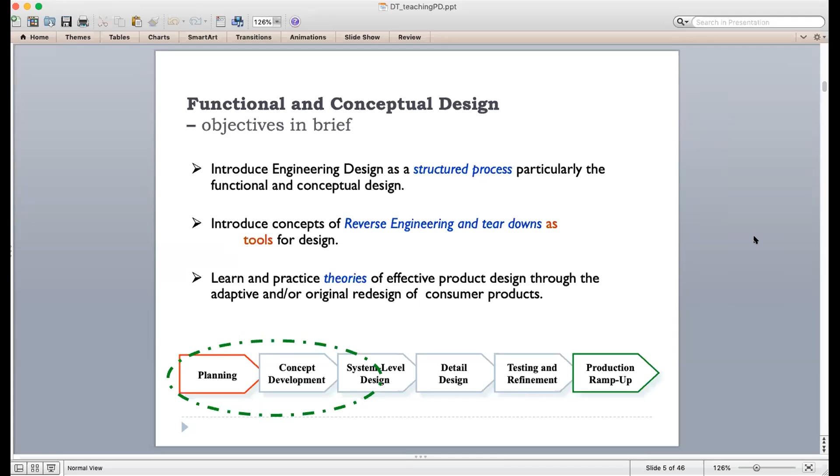As I had shown, from the entire product development cycle, we focus on the early stages of the design process, which is where we have a lot of synthesis. As you will see later, when we come to design details, testing, refinement and production, that is our conventional engineering. The scope lies there, in conventional engineering analysis. But these early stages of development is where the idea of innovation, the emphasis of developing these concepts, is placed. And the students are made to understand the significance of the need for a very detailed and thorough system level design and thinking about this form and function, and how we can develop the concepts.

As part of the lab, we have several activities to place emphasis on the different design processes. So we start right from building the teams. Even team building exercises are given to them so that as a team, they know how to work and what to expect, how they can assign tasks to different members, whether it be the leadership role or more of communication within the group. So they know how to gel together and work as a team. This extends to doing a lot of product tear down exercises, right from consumer products to engineering components like engines or drive shafts, to consumer products like electronic or mechatronic components used in home or office. So they do this product dissection and try to understand the form and function.

They also do a course project wherein they can exercise whatever they learn in terms of designing new products or trying to find a variant to the existing product. We try to also bring in industry wherever possible, because a lot of design problems are there in the industry, and sometimes these young minds, the students, just after their schooling, in their first year, are quite dynamic, very energetic, and they can also think very wildly. So thinking about concept development, when we as engineers know about the practical constraints and considerations of the design, our ability to think about the various ways of achieving a function is diminished.

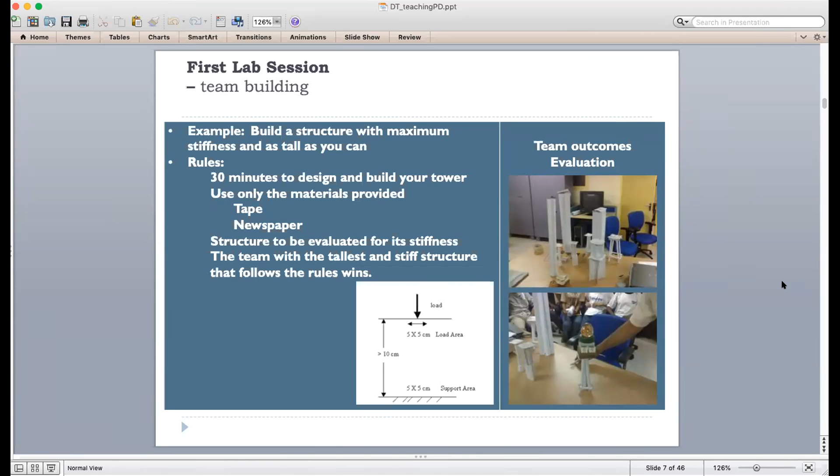What we do is we have a series of product dissection or product teardown labs, as I mentioned, where they try to understand what the product is and what the customer sees. So they use the product. Let's say if I have a mixer, they try to use it to see what are the functions of this. Or if there is a water cooler, they try to use that system and understand what this product is doing. And then we pose them questions like, how is it doing this? Or whatever function this product is performing, how is it doing it? So they try to understand product dissection.

Hello? So sorry, there is some disturbance, or I thought there was some question.

Yes, I am having practical examples. I have taken some 4 or 5 practical examples. I would be discussing that. Okay, yeah.

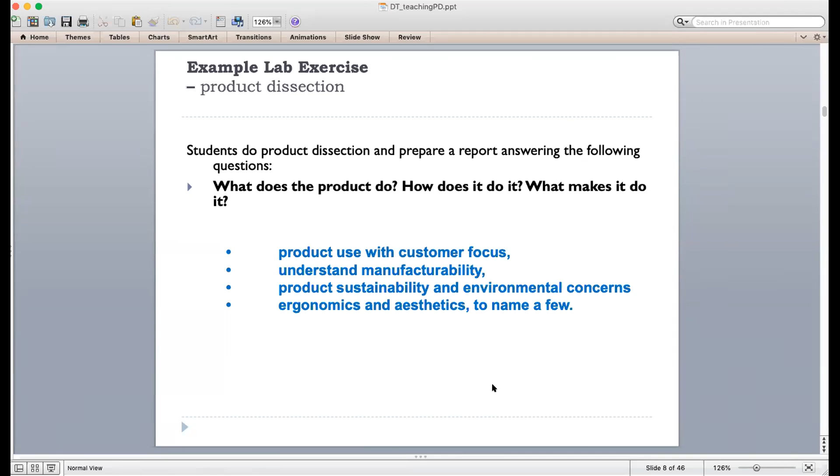So these are some things that we do for each product dissection exercise that we give. I just thought I will take one example. So here you see that there is a blender. Typically we have about 60 students. So what we do is we have about 10 to 12 products and a team of some 4 or 5 students. They cycle through this for the whole semester, wherein for each product, one group would have taken this blender and would have understood the design for manufacturing aspect.

But the next week, another group will take the same product and probably discuss design for assembly. This way, we ensure that the scope for each team with respect to each product is different, and there is no repetition or monotonicity that they can try to understand from another team. This also places an emphasis that between teams they can discuss later what they did and what they tried to understand. So we try to do this mix and match of different activities with different groups, ensuring there is no monotonicity in the whole exercise for the entire semester.

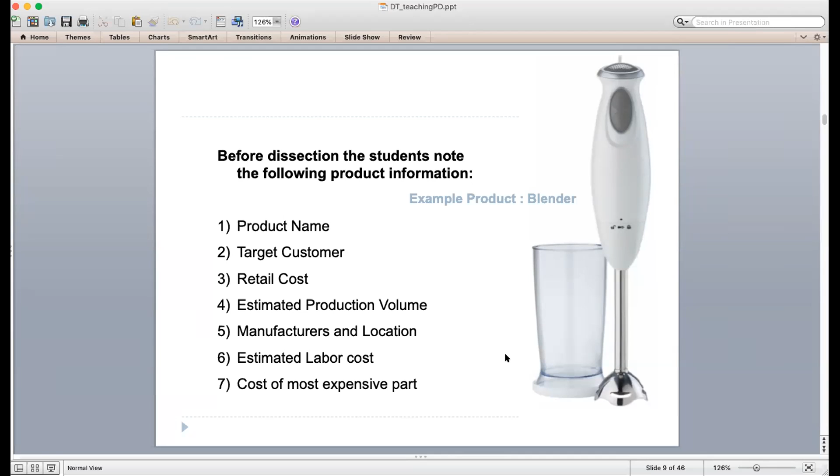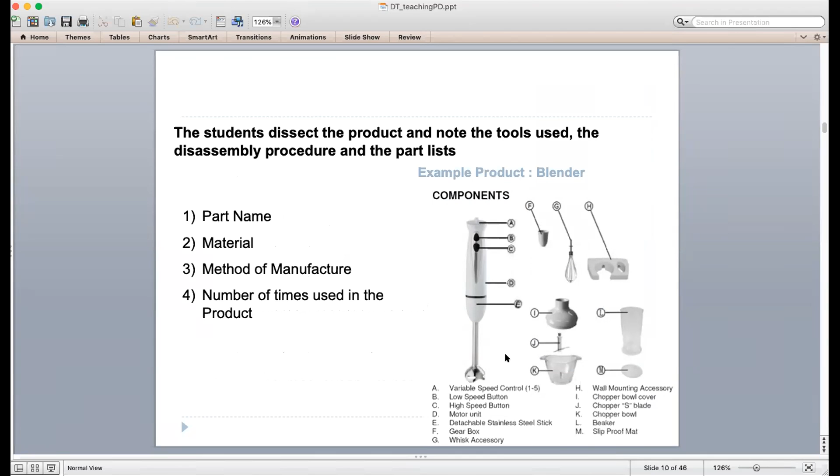So they understand the product dissection, the components, the method of manufacture, the assembly, as I said, and the cost perspective - can some components be replaced, or can some components be combined? Some design for assembly concepts can be used, design for cost concepts can be used. So these are some things that they learn.

And one other important activity that they do as part of each product is connecting this function and form. So we ask them to build what is called a function structure. If some of you have been doing this design course teaching, there are these concepts of function structure.

One of the earliest thinking in terms of this, and in terms of the presentation of this way of thinking, was done by the German design pedagogy people like Pahl and Beitz. Their book is very famous - the engineering design process book by Pahl and Beitz. So that introduces these concepts of creating function structure.

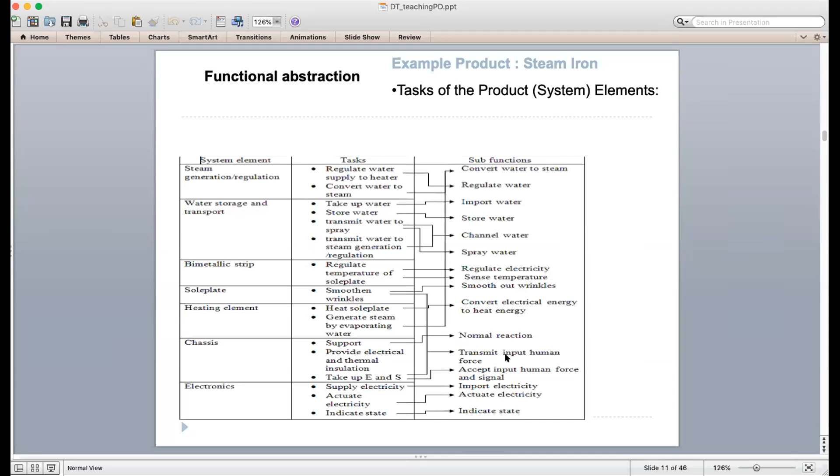So every product is seen as a flow of material, a flow of energy, and a flow of signal. So an abstraction of each product is made in terms of what is the material, what is the energy, and what is the signal. Every product is thought of as an embodiment of these three, and a flow structure is created. This creates an abstraction of the product in terms of function, moving away from form to function by understanding these connections. We give them exercises like understanding whether energy is being converted from one form to another, or its magnitude is increased, like force converted to torque, or electrical energy converted to mechanical energy, or the material is being transformed, like taken in bulk form and getting into pulverized form, or information is embedded, like quality concepts.

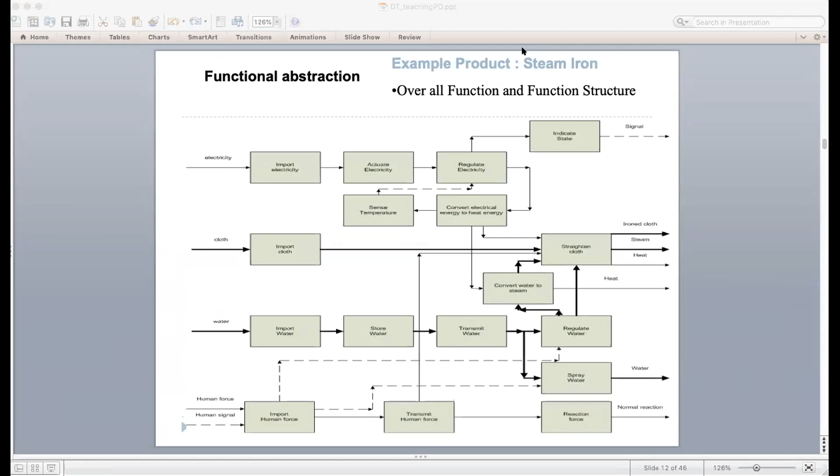Hello? Tell me, sir. No, sorry, I thought there was some question, so I was just trying to shift between the chat window. No question, sir, you can proceed. Whenever there is an audio response, I just try to pause and see if there are any questions or discussion. Okay, yeah.

So we ask the students to create these kind of function structures where they understand the individual tasks that need to be performed, and what is the flow of energy, signal, or material. They get this idea of systems thinking, because any product can now be thought of as a transformation of energy, material, and signal. A product is trying to transform these three inputs - signals, energy, and material - into certain outputs, which are again energy, signals, or materials. So we bring in this concept of systems thinking by asking them to create these kinds of function structures.

Here you see an example of a steam iron, for which the students have created the function structure where energy, in the form of electrical energy, is given, and the material here is the cloth that is getting transformed. A cloth with wrinkles gets transformed to a cloth without wrinkles in the process of ironing. Water is used to give additional steam so that hard wrinkles can be removed, and energy like human force or pressure is also needed in this process. So they try to connect all these elements, and signal in terms of where you want to iron - the human hand itself is the signal provider, because you are taking the iron to the place where you want to remove the wrinkles.

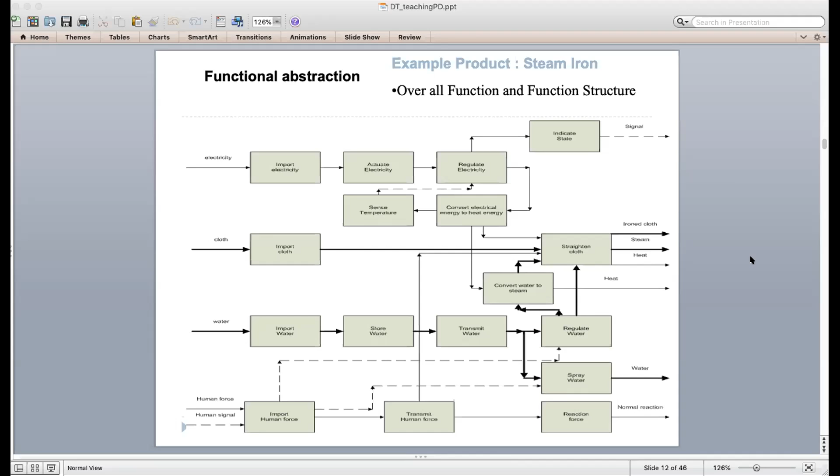This is just a very simple product, but this is how they understand that any product can be thought of as a system that is transforming energy, material, and signal. This is reinforced by giving lots of such exercises. For each product they try to create such kind of structure, and then they try to create some layouts, the geometric layouts, how these individual functions are embodied as subsystems and how they are placed, so that they have some idea about the product architecture.

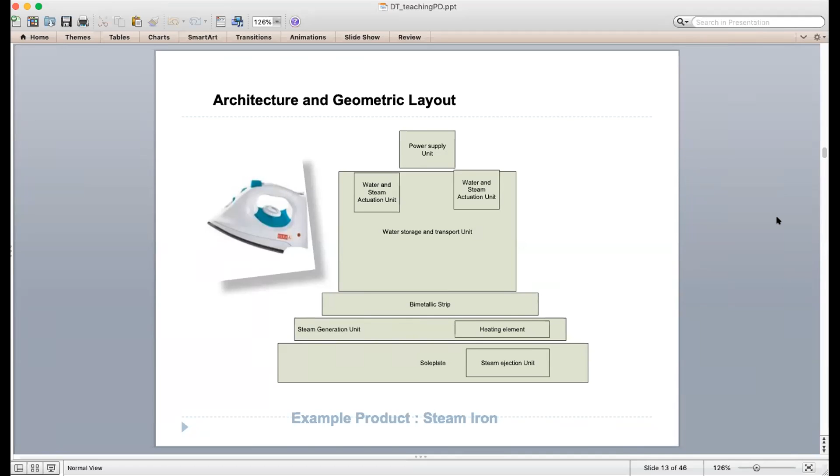They can also think about product architecture variants, how to create different variants, like one can assemble the products or keep them in a vertical orientation or horizontal orientation, or how do they place these different components in the context of usability, or in the context of maintenance of the component. So they can try to understand how the geometric layout plays a significant role in terms of designing some of these attributes of the product.

We also place emphasis on concept generation. Once they do a certain number of these product dissections and understand the form and function mapping, we ask them to generate new concepts. Given a product and understanding the different functions to be done, can they create a new design? Can they create a variant of this design? Given a product, can they think of doing this function in a different way? So these concept generation ideas are then emphasized.

As part of one theory lecture hour, we also teach them some tools that they can use, like QFD tools to generate concepts, or they can create matrix methods. All these methods are taught as part of a one hour contact session, so there isn't too much lecture, but we tell them these are some tools they can use along with their product design activity. In these lecture hours, we give them some idea about tools - for example, we teach them what TRIZ is, and the inventive principles of TRIZ, the 40 inventive principles of TRIZ, and how that can be applied in some context.

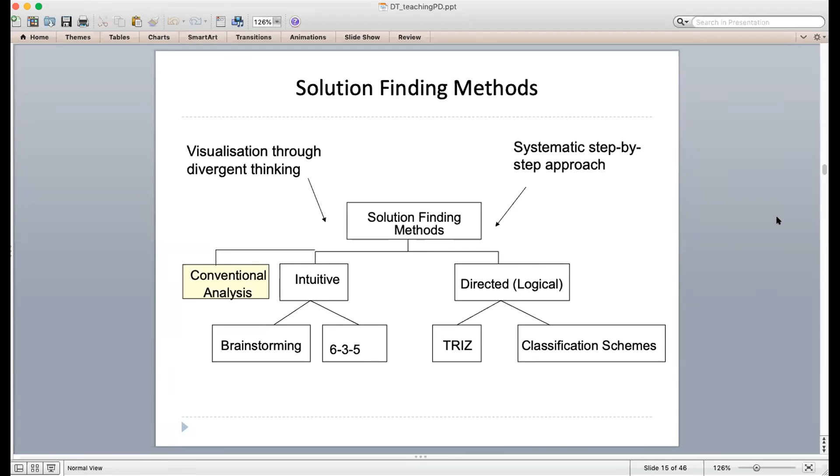So we asked the students to think and come up with a lot of these concepts by guiding them, but making sure that the entire brainstorming exercise happens from the students' end.

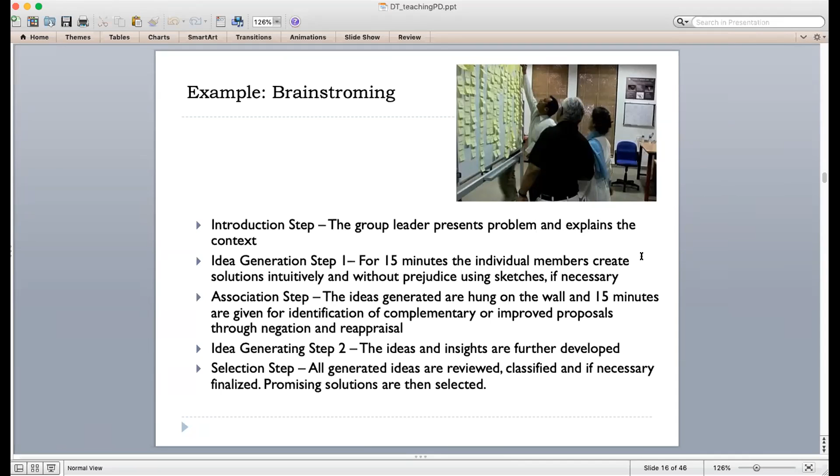We have done this kind of exercise sometimes as a whole day or half day activity. If it doesn't fit into our regular curriculum, we push it to a weekend, like a Saturday, so they can spend at least 4 or 5 hours together thinking about a given product, because typically our lab sessions are limited to 2 to 3 hours, just to handhold them in this design thinking process. At least one workshop kind of activity we do maybe on a weekend, so they know this is what they can do, and later they can practice for various other products at their own convenience and their own ways of meeting and discussing.

Just 1 minute. Hello. Divya, I'm in a talk. Huh? I will take the call later.

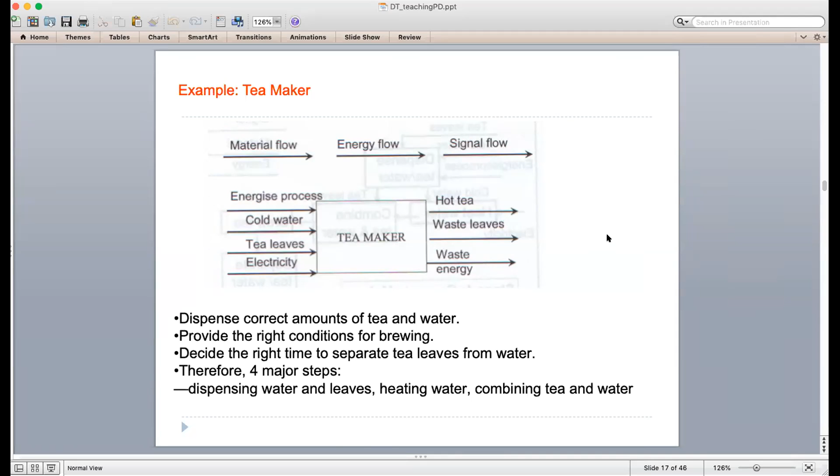Sorry. So the three major sub-functions I have just listed, and for each of these the team comes up with different concepts. Like if I take dispensing water and leaves, these are the different mechanisms to dispense tea. You can use a screw type dispenser, where a known quantity of tea can be dispensed with a particular rotation. Or I can have a sliding gate, where a known quantity of tea can be taken from the hopper for making the tea decoction. Or you can have a simple reciprocating piston mechanism.

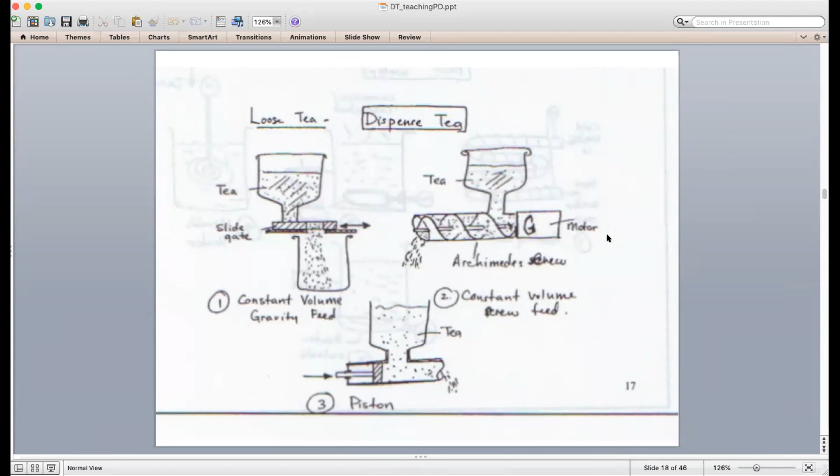So they think about these concepts. Or if it is about dispensing water, they come up with these different concepts.

Each member comes with a concept, then discusses with others and improves the concepts. It's like a 6-3-5 method, where each person comes with one concept, others comment on it, and then concepts are merged together to create better concepts.

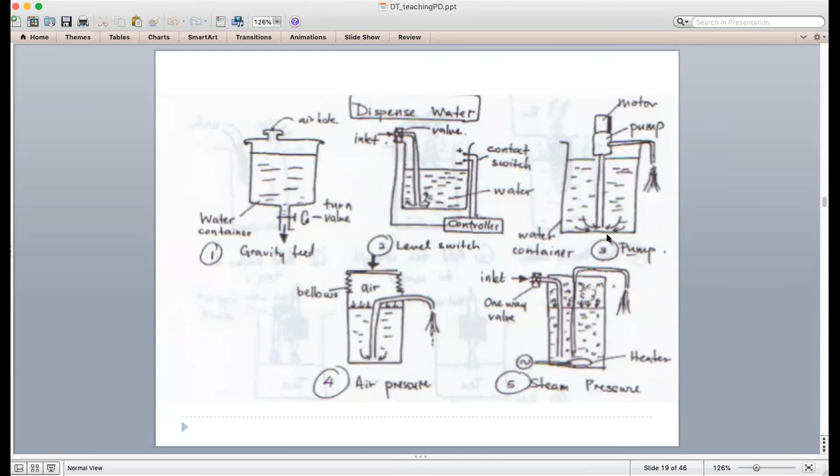These things are practiced by the students, like different mechanisms for dispensing water, using a bellow, air, a motor and pump, or steam pressure. And for heating the water, different mechanisms like induction heating or traditional immersion heaters, and so forth, for combining the tea and water to create the final tea.

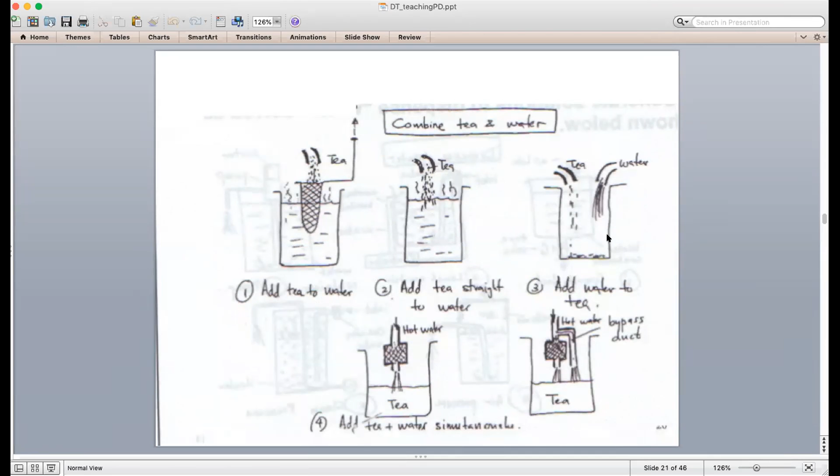This is just an example of a product on which some team has worked on. This happens throughout the semester, and along with this we give them some design project on which they can continuously work for the entire semester.

The scope of the product is given to them, and they work on the product design, mainly the conceptual development. As I said, we don't give them projects which need a lot of detailed engineering design, but rather it involves a lot of conceptual exercise, lot of design synthesis rather than analysis. So we choose and give them activities like that.

This is one year's activity I just thought I would share. Here we gave this exercise of walking on the water.

What you see here is a small insect that actually walks on water. We say that this product is motivated by this ability of this insect to walk on water.

Whether it is using the concept of buoyancy, or whether it is using the concept of surface tension, they can figure out. Some product may use one of these, or together both buoyancy as well as surface tension. So they try to figure that out, and try to embody this into the product, and they come up with different concepts.

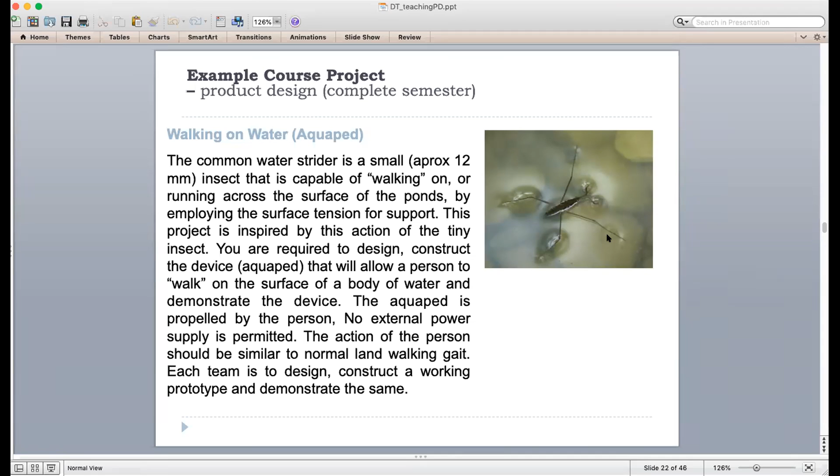Here is what you see. We took the students to our swimming pool, asked them to demonstrate the product towards the end of the semester.

So it's both a fun-filled activity, but it also teaches them the various concepts of the design.

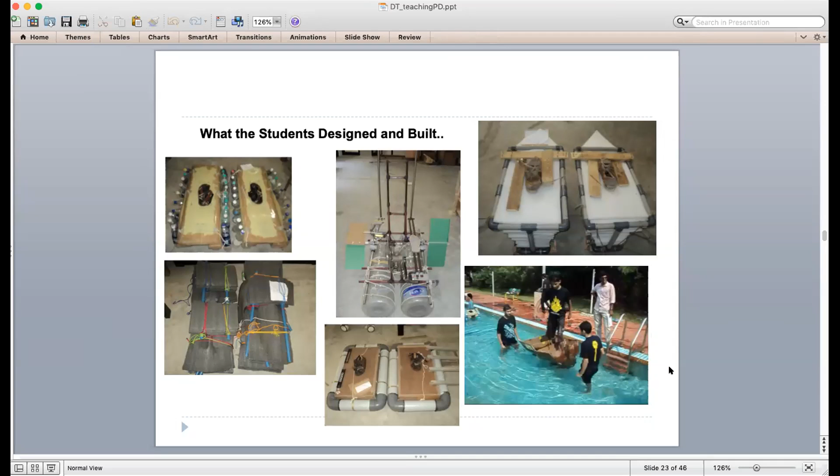I would take you through a few more project examples, and some projects being given by industry, and how the students developed the concepts.

Here, this is a concept of having a public shared bicycle. We know that most bicycles have been designed for personal use. The design consideration for bicycles is that it will be used by a single person, so the amount of usage may not be very extensive, and thereby the requirement for maintenance and all of that. Every aspect of the product is tuned considering cost and usage, and this product has traditionally been designed considering it as personal usage.

Now with the shared bicycle concept, many Western countries have it, and in India also it is coming up. A lot of such exercise has been done, but this company was interested. This was sponsored, or the problem statement was given by a company or an entrepreneur who wanted to redesign the bicycle considering various issues when we use this as a shared bicycle concept.

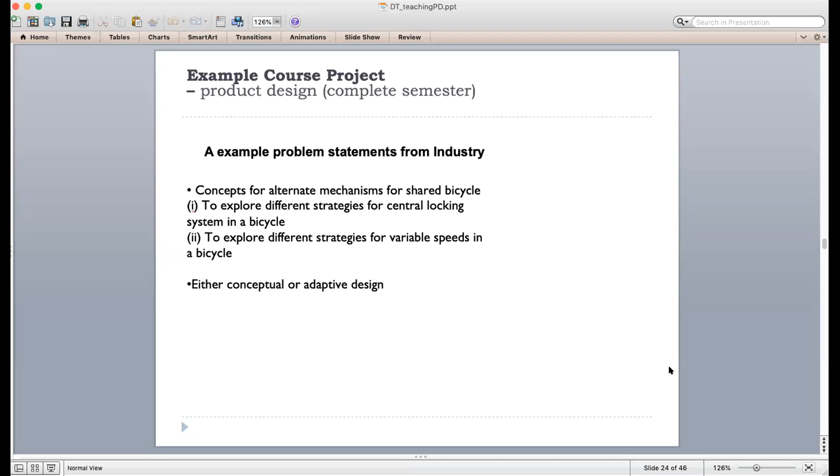Considering all these aspects, the students had to come up with a lot of different ways of thinking about this, and many concepts came. Here you see a brainstorming session. What we do is bring in these industry people every now and then during the entire semester at different stages. So they first identify the problem, and then they are ready to discuss about it.

We have one session with the industry people, and then they do brainstorming and develop some concepts. We have another session with them, so they provide constraints when you connect with industry people. But when students do the brainstorming, they do a very wild exploration of the design space available. This way we funnel out the ideas. They think very wildly, starting with a lot of ideas, then slowly we funnel considering various engineering and practical constraints, and come up with one or two concepts which they can further explore and create the proof of concept.

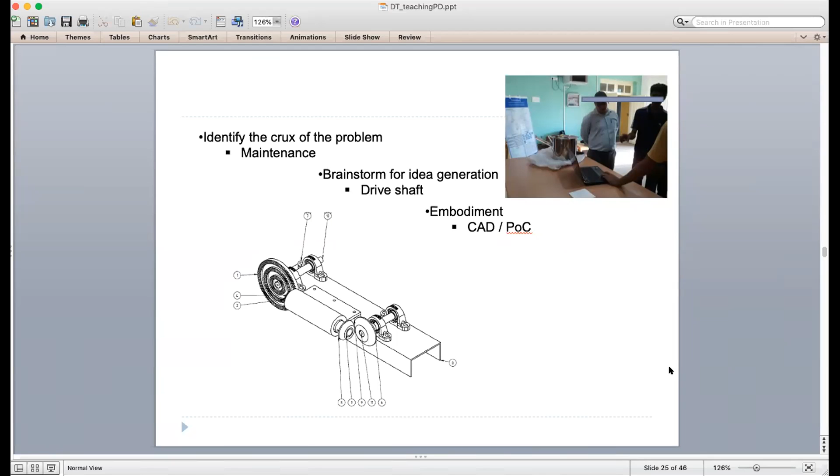So here you see a drive shaft kind of mechanism being used in a cycle. Now probably even you would have seen some advertisements coming up even on our TVs for cycles without chains and sprockets. These are some concepts that these students thought of, and there are several examples like this.

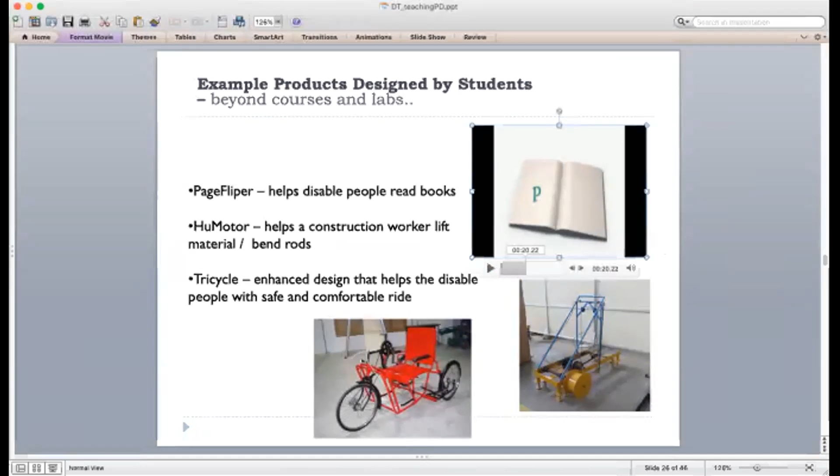Let me see if this runs. Sorry, this video. Sorry, I think this video may not run. Okay, anyway, it doesn't matter.

So this is another example of a product which is used to flip pages of a book, so that it can help a person, let's say temporarily handicapped because he met with an accident and is not able to use his hands, or he could be a permanently disabled person who may be interested to use this device to flip the pages. Or there are other scenarios you can think of.

This digitizing scenario - there are a lot of old records available, and we would like to have a digitizer where you flip all these pages sequentially, take photographs, and digitize the old hard copy documents. Or in the context of a stage music play, you have the music notes page, and every now and then you don't want the player to flip the pages, but rather you can have a device which flips the notes for him while he continues to play. So there are very many areas or application domains where this could find a use, and in fact the students came up with several designs.

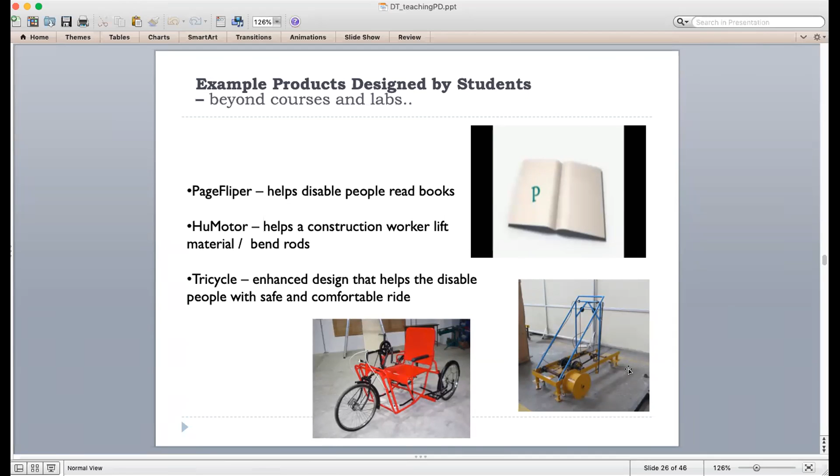So here what you see is another example of the HuMotor, where this device is used to help small construction activity like moving material to a single floor. Typically you will see that they put a ramp or a scaffold, and people carry the material, but instead of doing that, this is a simple device which can help in lifting the material.

Okay, so maybe I will go into more detail of how they did this, in one product. Like if you take this page flipper, they came up with the different functions that a page flipper has to do. Like it has to hold the paper, it has to lift the paper, so some 2-3 functions that it has to do. What are the different ways of doing it?

Let's say if it has to lift the paper, I can use a roller, a friction wheel that can roll over the paper. Then what are the pitfalls of that, whether the paper will get damaged. If it is a vacuum suction mechanism, how that can be used, what are the pros and cons. Or if it is using electrostatic charge, sticking, or using a tape adhesive, all these concepts. Some may be employable, some may not be employable in some context, or each will have its own pros and cons.

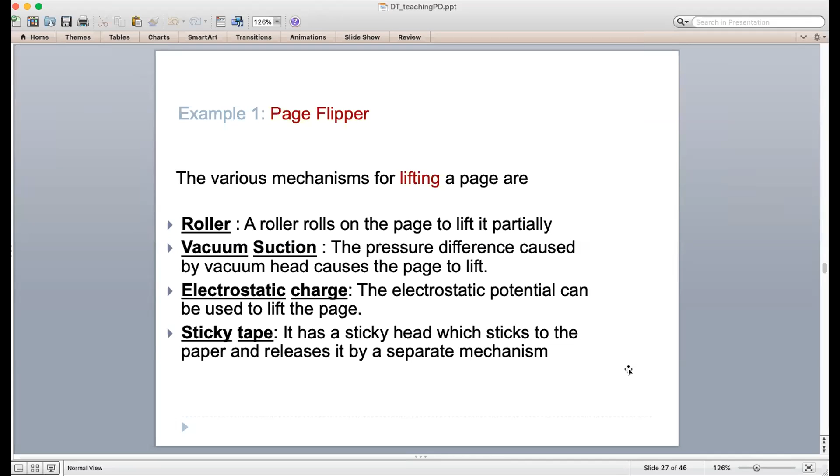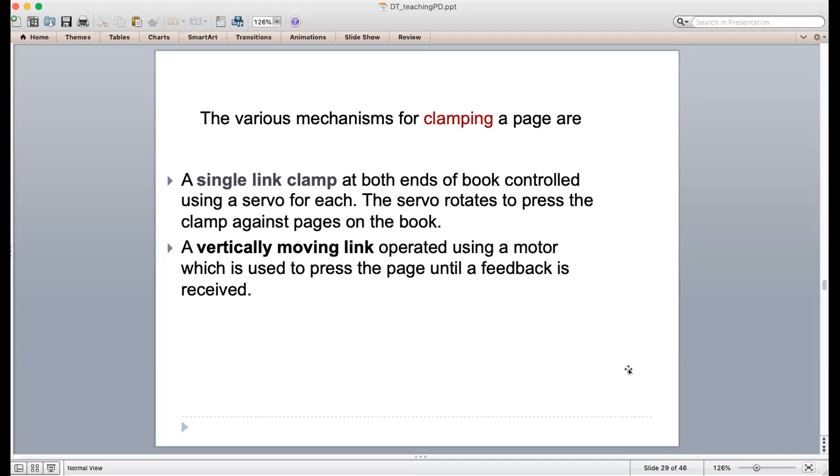So they develop a lot of these variants. Let's say for each of the subsystems they develop 4 or 5 concepts. You can see that by permutation and combination they come up with a lot of variants of the design. Say this is another mechanism like turning - again they came up with some 3-4 ways of turning the page. Or if it is clamping, there are some 2-3 ways of clamping. So now for these 3 main functions, they have these different concepts, and every permutation can be checked, or they can create prototypes, embody it, or do the analysis. So all of this they did.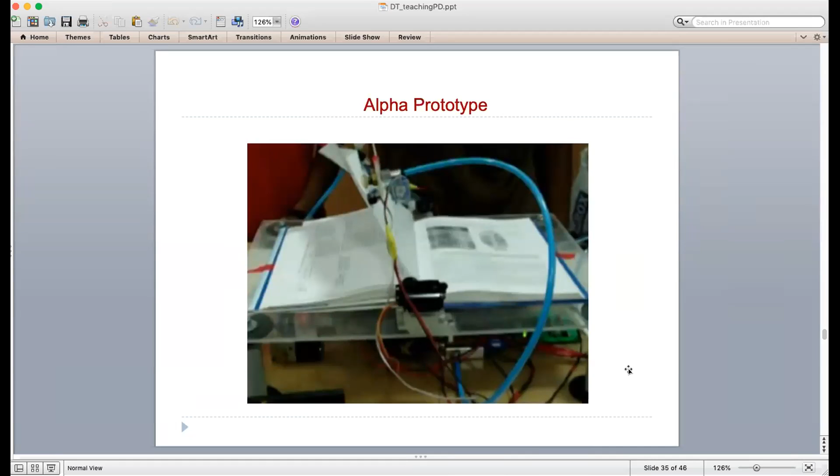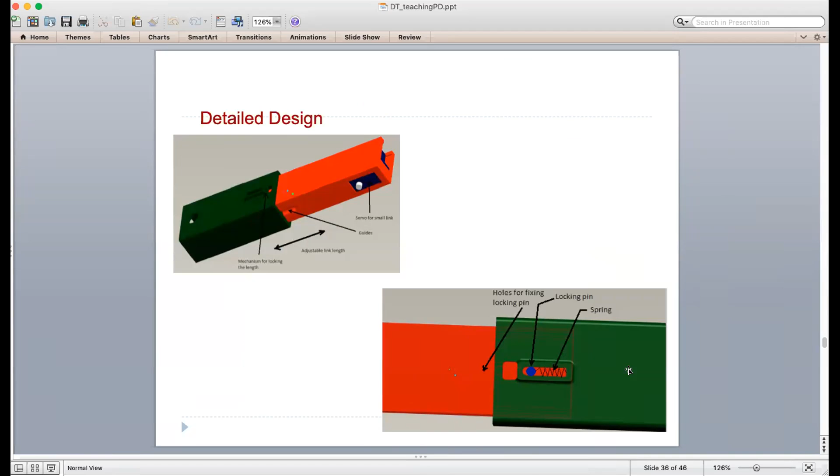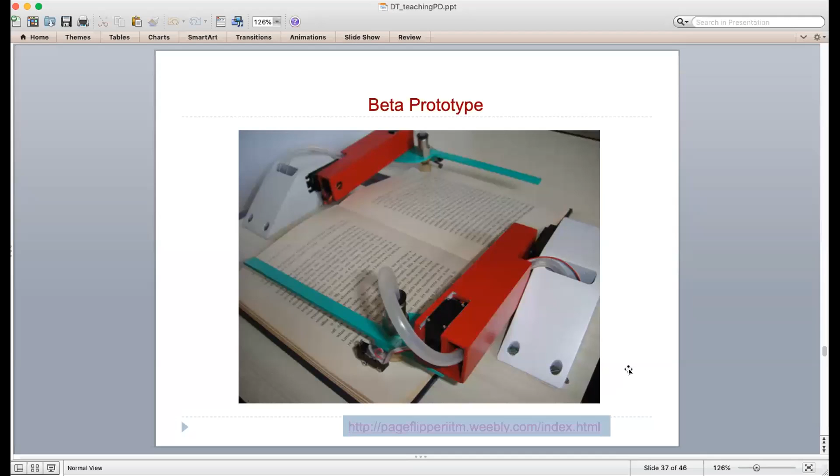So you can see these are the details of the design. They prototyped it, used 3D printers to quickly get the components, looked at the aesthetic part of it, and did beta products. So all this, like 2-3 iterations of going through this whole exercise. So this is another example.

So typically you will see that there are 2-3 actions or mechanisms that are required. Like if you even take this tailgate, you will see that you have a mechanism to lock, a mechanism to hold the tailgate, and another mechanism to do the lifting, like this hydraulic or pneumatic lifting. So you will see that all these components need to be attached to the glass. This is again a problem coming from an industry.

I just thought I'll show some of the problems that the students worked on. So the problem statement given to the student was, now I have to drill holes, or I have to do this design for manufacturing.

Basically, the idea was for the students to understand design for manufacturing, that on this glass they have to fix the lock, make provisions for attaching the hinges and the lift, the pneumatic lift mechanism. So all these will need post processing, and to reduce the cost of the product, we would like to do a DFM and A analysis, so that you can reduce these connections. The students actually came up with a single mechanism which will do all the jobs. It will be a hinge, it will also be a lock, it will also provide the required lifting and holding into a given position, like a bistable mechanism, it will open up and it will be stable in one position. All of this as a single component.

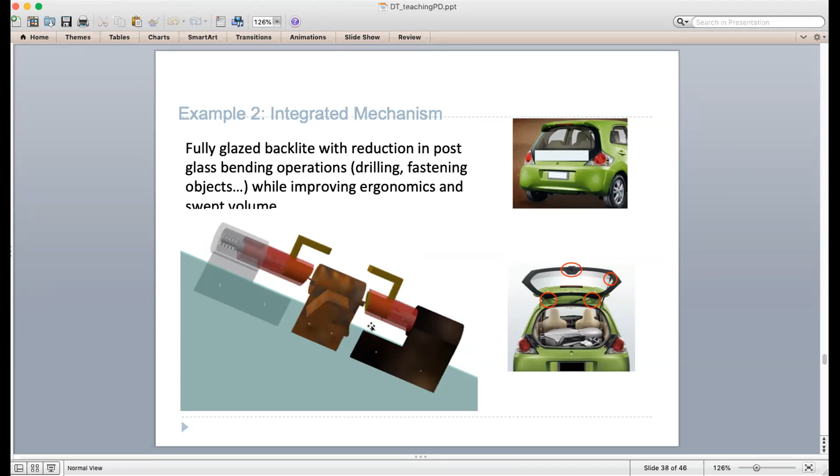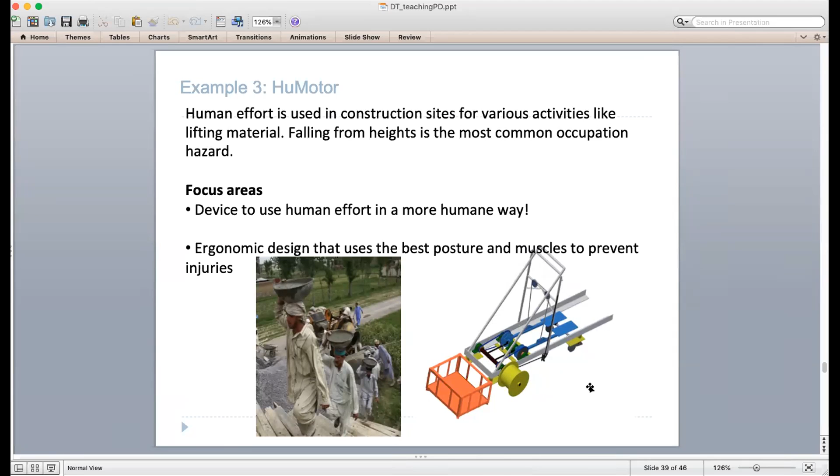So that was the concept developed by these students, one integrated mechanism to do this. This is that example I talked about, the HuMotor. This device again went through several iterations of creation, and the product was of interest, and in fact the Building Material Technology Corporation even funded further development to see if this product can go into the market, and some small scale construction activity builders can use this. So you can see at least 4 to 5 prototype versions built by the students, tested in the lab.

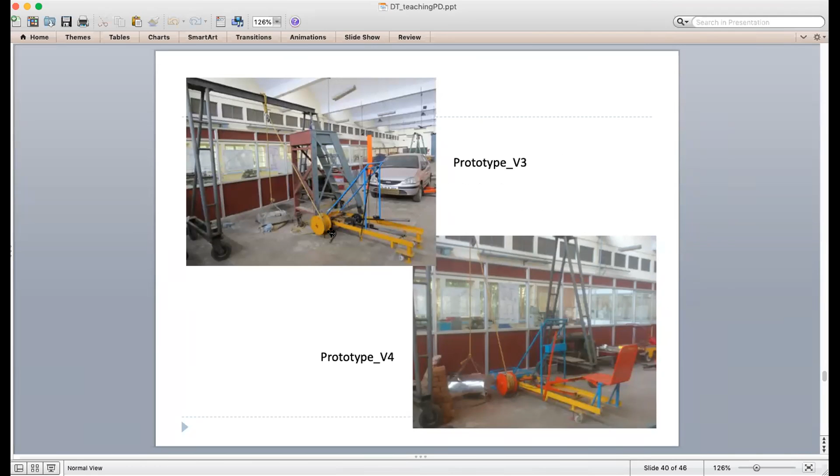This is another product again from the construction industry, motivated by the fact that now we have a machine which can use the strongest muscle of the human body, the thigh muscle, for the pedaling action, which will be converted into a power source. In this case, it is used for lifting weight, but the same force and power generated can be used for another activity, which is bending the rod. So this is more like an attachment to the same machine, pursued by another set of students, used for bending rods.

If you see, this is one typical activity, and it is very strenuous, because he is using his hands to apply the force and bend these rods. Here you will see that this table and the drive mechanism is connected to the powerhouse, which is the HuMotor, and one can do the rod bending activity using this. Again, this is derived from the need to reduce the injuries that may happen, like muscle injuries, muscle tear, or muscle pain. All of that could be avoided.

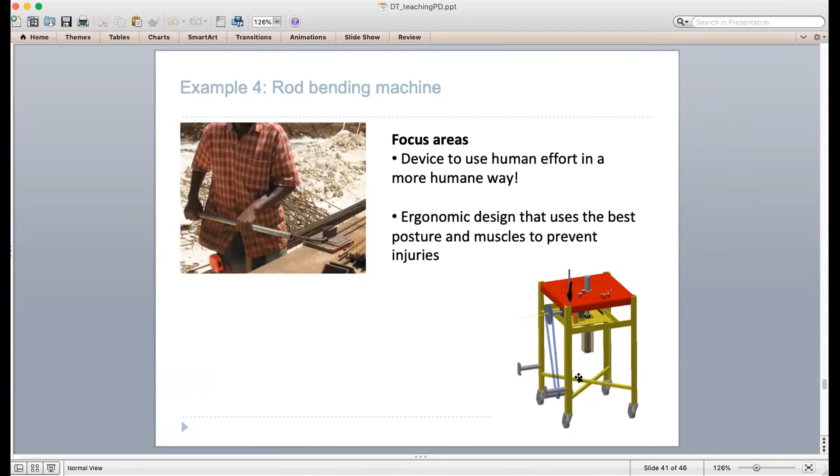So this is again testing and improvising the product. We bring in the users. In this case, the construction user gives us feedback, the students learn from them, they understand what to improve on the product.

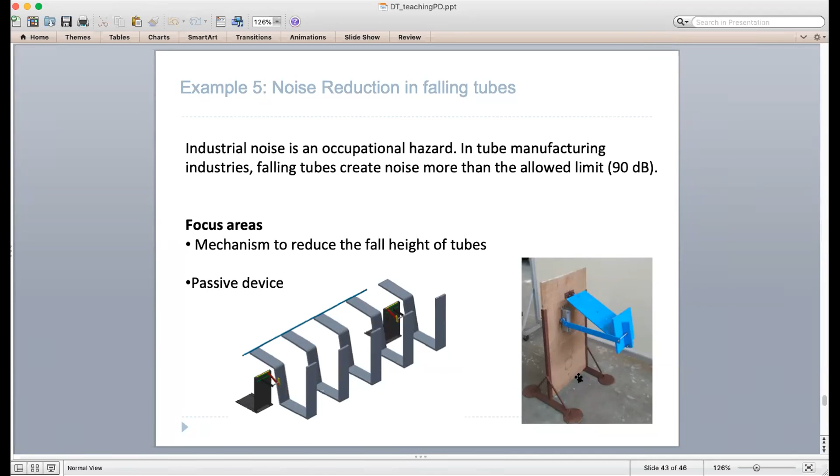So these are some examples that I thought I would share with you. Quickly, these exercises are also academically rewarding. Some students, at least those who are interested, also pursued this in terms of conference papers and posters and so forth, a lot of patents and patent documentation. The students are involved also in terms of this kind of intellectual activity, along with what they do.

I think that's all I thought of discussing, so we can have some interaction. I would like to thank my colleagues, this is not just a one-man show. I'm just part of a team, and I have my colleagues like Sandeepan, Paraniappan, Ramu, and a lot of students, project staff, workshop staff, all involved in whatever activities I have tried to showcase to you. So I would now ask the moderator or whomsoever is there to help me in interacting with the participants, or talk to them.